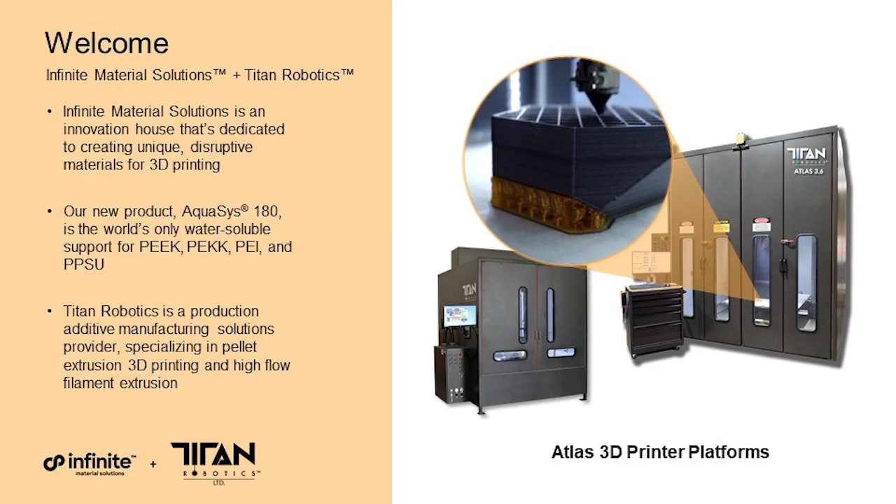Titan Robotics and Infinite Material Solutions have been longtime partners, and we're excited to share how Infinite's disruptive water-soluble materials and Titan's industrial production additive manufacturing solutions are the ideal fit and work together. We're also talking about a brand new product from Infinite today, AquaSys 180. We'll start off with an overview of today's agenda for the webinar.

Rahul Kasat, Titan's CEO, will give us a high-level overview of pellet extrusion versus filament extrusion and how those two technologies differ and how they can be used together on Titan's production additive manufacturing systems. Next, we'll talk about how Titan Systems and Infinite Material Solutions' unique water-soluble materials are a perfect fit and work so well together, and some of those applications and examples of real-life prints that are being used in production applications today.

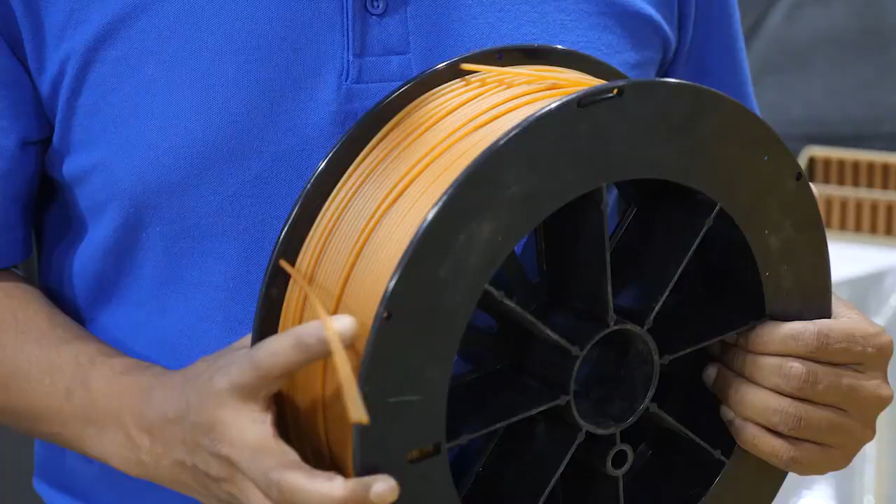We'll start off with a high-level overview of two types of material extrusion techniques that we're going to focus on today: filament extrusion and pellet extrusion. This is probably familiar ground to many of you, but to make sure, here is a quick overview. Filament extrusion, also called fused filament fabrication or FFF, is the process of extruding a thin strand of thermoplastic material or plastic filament and then depositing the molten material layer by layer.

Pellet extrusion, on the other hand, is a similar process, but instead of using filament, it uses injection molding pellets like this. As a pioneer in large format pellet extrusion 3D printing, we want to highlight several key advantages of direct pellet 3D printing. One of the biggest advantages is cost savings. Pellets are typically 10 times cheaper than 3D printing filaments. Commodity pellet materials like ABS or PLA can cost as little as $2 to $3 per pound.

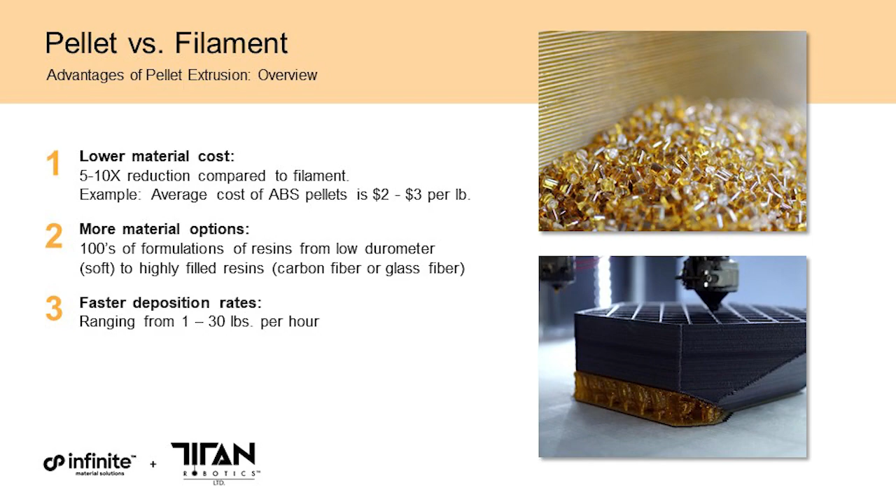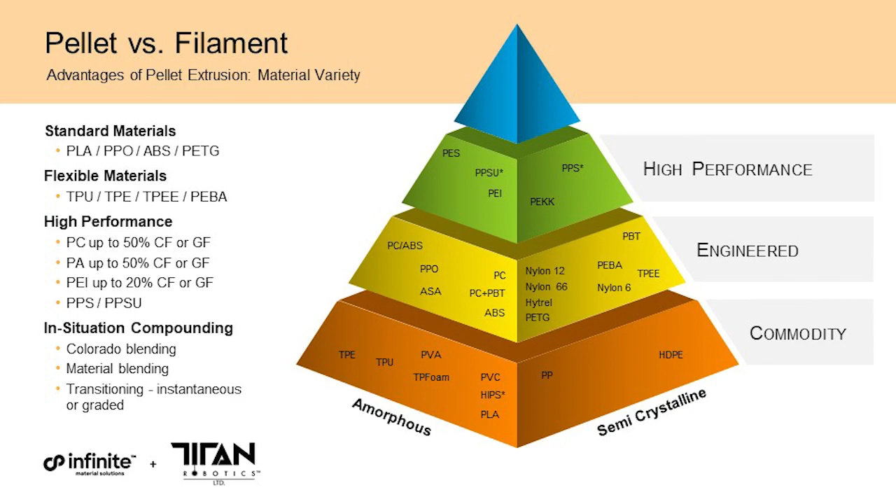Another benefit to printing with pellets is the wide range of materials that can be printed. Because the material does not need to be filamentized onto a spool, you can use highly filled materials with high carbon fiber or glass fiber content. From the high performance to the highly flexible materials, we have successfully printed hundreds of grades of pellet materials. This means you're not limited to just a handful of materials that are available on the market.

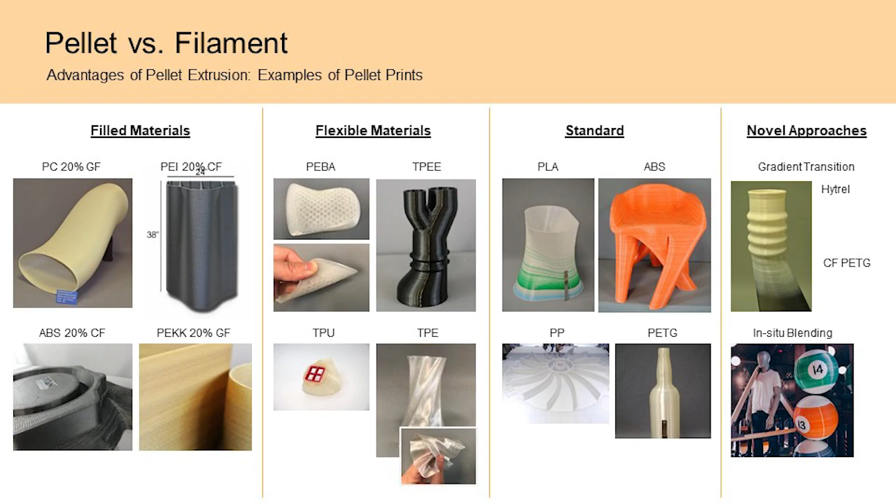You can choose the right material for your application, or work with a material supplier like IMS to create custom compounds. Here you can see a small sample of some of the materials and the parts we have printed out of a variety of pellet materials. Pellet extrusion can achieve high resolution by printing with smaller nozzles, such as 0.6 millimeter, or even in some cases 0.4 millimeter nozzle diameters on Titan's Atlas platform. The nozzle size, especially on the smallest end, is highly dependent on the material and part geometry.

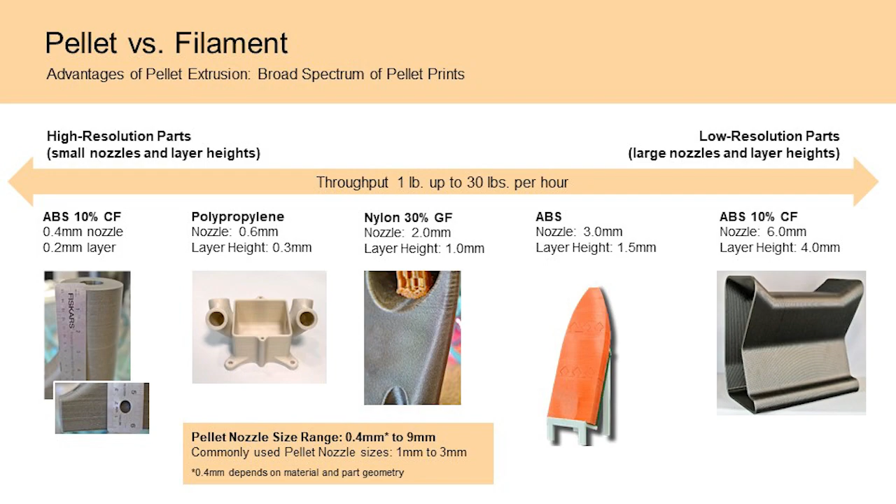The throughput you can achieve with pellet extrusion 3D printing is also higher compared to filament extrusion. With a larger nozzle and more liquefied material, flow rates can range from a few pounds an hour to up to 30 pounds an hour, depending on your nozzle size, material choice, and part geometry.

I'm going to show you two examples of parts printed using Titan's pellet extrusion technology. These are very unique materials. One is a highly flexible material, TPE, which you cannot print with filament extrusion technology because you can't even make filaments of this. You can see the flexibility of this material. The part came out of the Atlas 3D printer.

The second part is a highly stiff material, made out of 30% glass fiber PEKK. Again, you can't even make a filament out of this. So this is a unique part that you can 3D print using Titan's pellet extrusion technology.

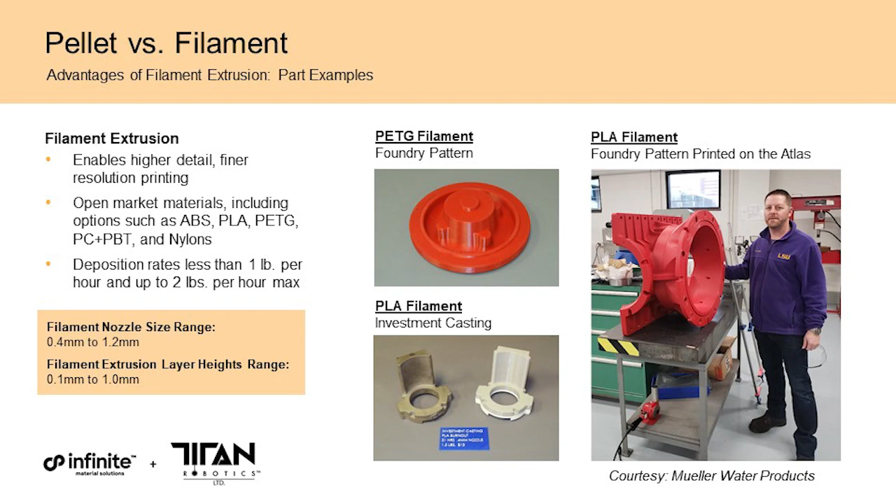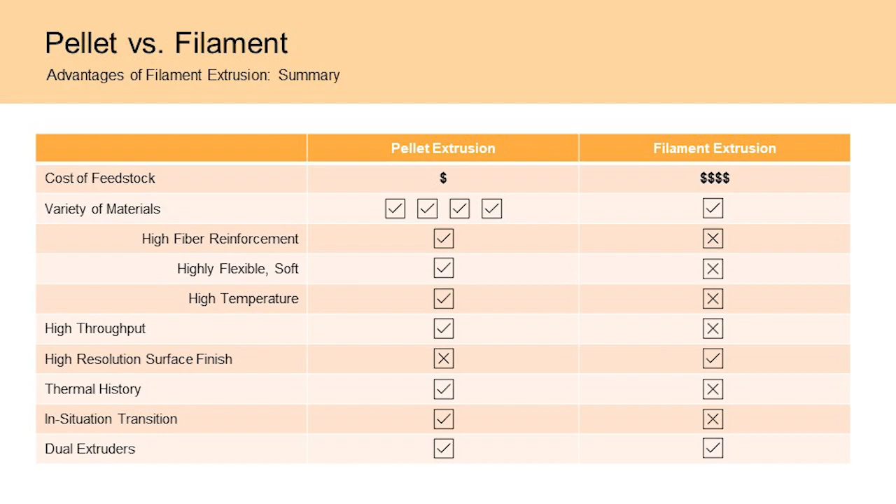To summarize, printing directly with thermoplastic pellets is up to 10 times cheaper than filament extrusion, up to 10 times faster than filament extrusion, and opens the door to hundreds of materials that can be 3D printed. When it comes to surface resolution, filament extrusion will have the advantage. But filament extrusion tends to be a slower process with much longer print times compared to printing directly with pellets.

Here you can see the incredible speed at which a pellet extrusion part is being 3D printed, reducing print times from days to just hours.

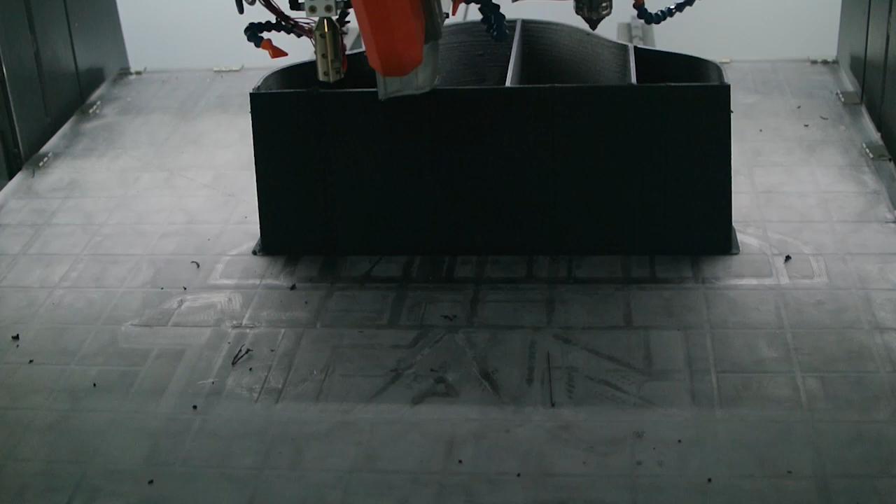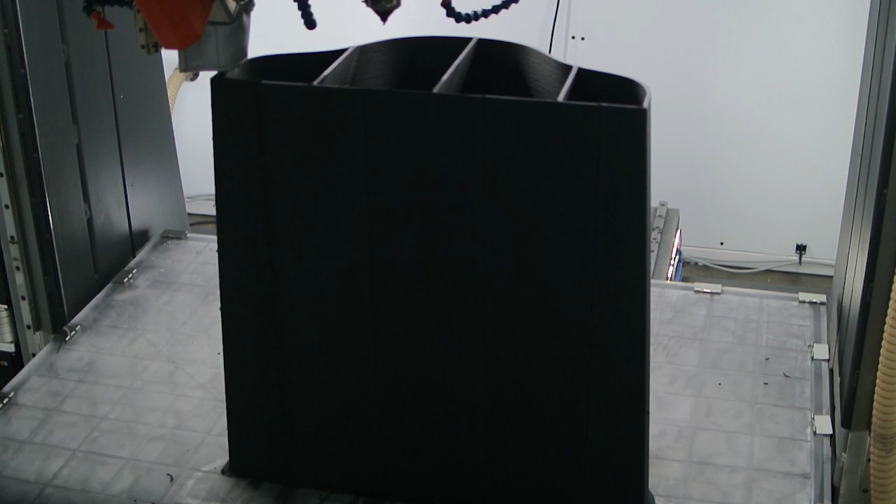When you compare the two technologies, this 40-inch layup tool only took 12 hours to print and cost less than $500 in material for carbon-filled High-Temp with pellet extrusion technology. If you had to print the same part in filament extrusion, it would have taken 120 hours to print and would cost almost $2,500 in raw materials.

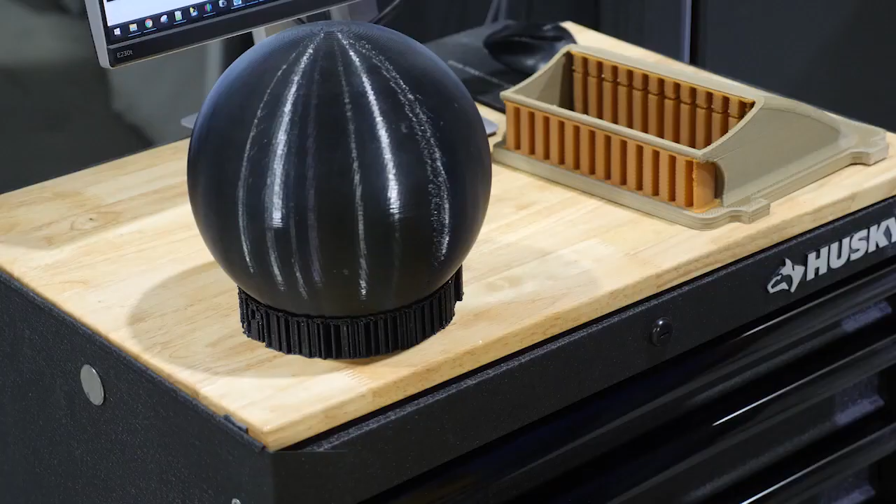Let's talk about why we need support material. No matter what type of extrusion process you're using for 3D printing, overhangs and support structures are always a consideration, especially when you're trying to make complex geometries. Because you can't extrude molten plastic into mid-air, any part that has an overhang over 45 degrees will require support structures to hold up the plastic.

Support structures can be printed out of the same material as the model, as seen here. We use ABS plastic to print the top section and also the same plastic to print the bottom section. But removing this support can be difficult and leave behind artifacts where the supports were manually removed.

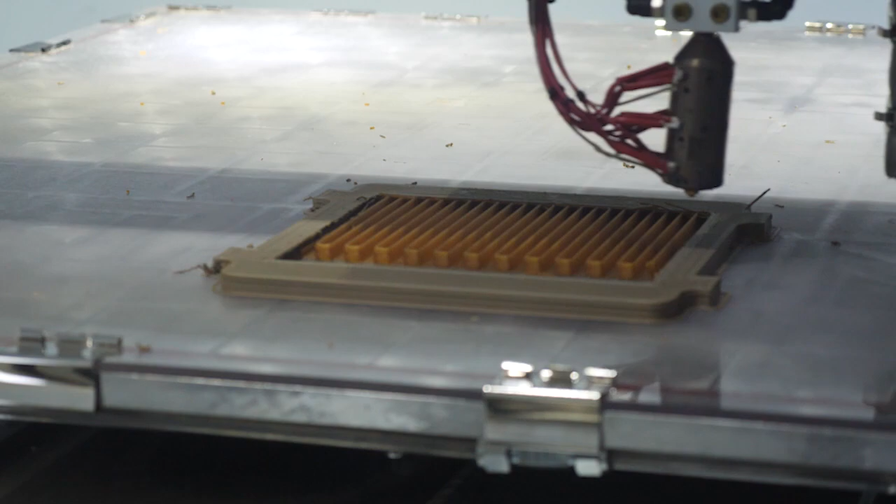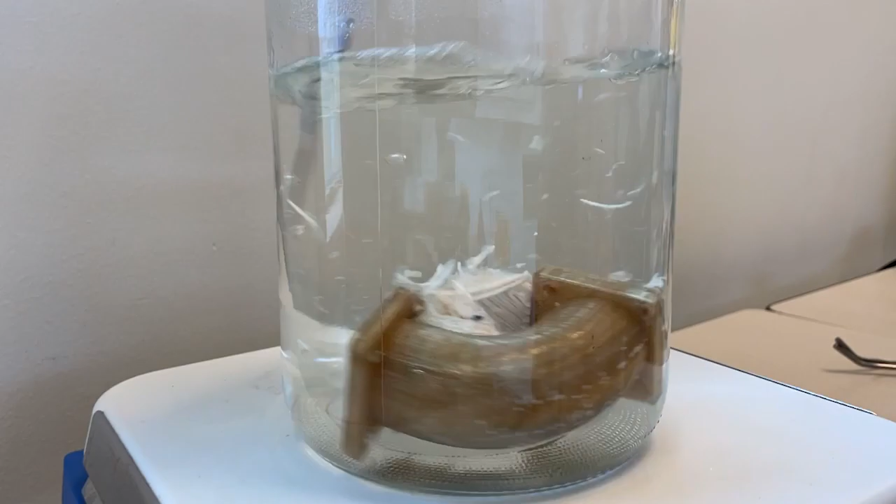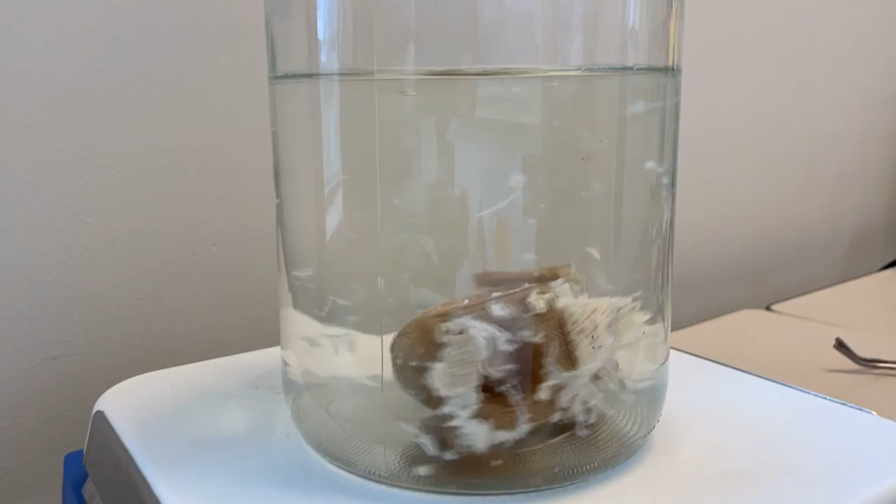With a dual extruder configuration, such as the hybrid pellet plus filament extrusion system seen here on the Atlas, support structures can be printed out of a water-soluble support material such as Aquasys 180. That material can easily be dissolved away using warm water. This method leaves behind a better surface finish when the supports are removed, and is not as labor-intensive as manually removing supports and sanding the part to get an excellent surface finish.

As an industrial additive manufacturing solutions provider, Titan's production-ready systems and technology are an ideal fit with Infinite Material Solutions' innovative and disruptive materials. Titan's mission is to enable the adoption of additive manufacturing into industrial production, and innovative materials like AquaSys 180 make that possible.

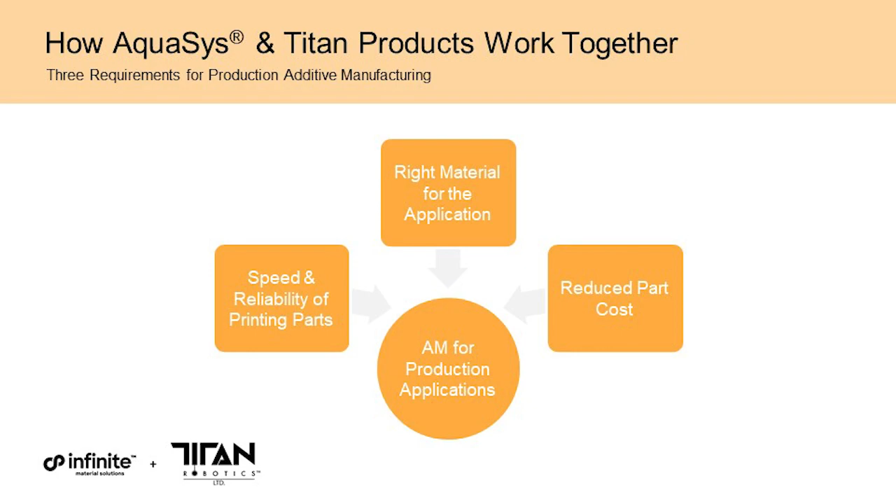In order to achieve production additive manufacturing, three elements have to come together: increasing the speed and reliability that parts can be produced, using the right material for the job, and reducing part cost. The ability to utilize high-performance, high-temperature materials with a water-soluble support material is key to produce end-use functional parts.

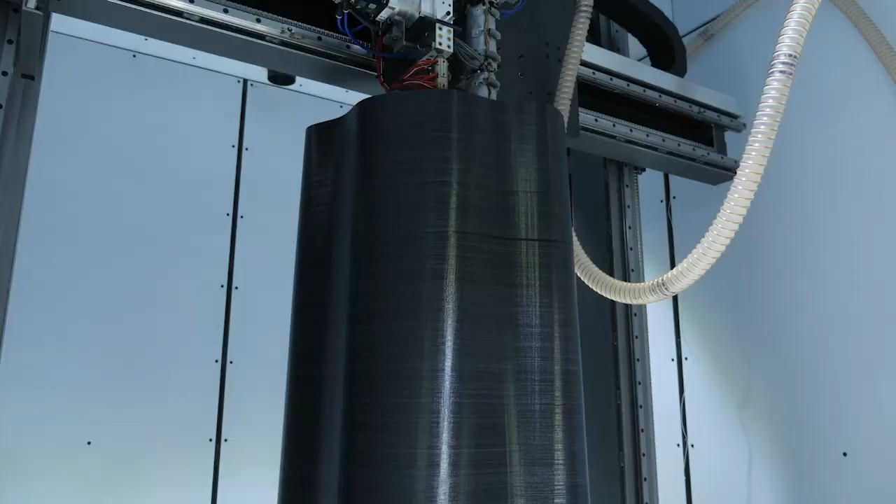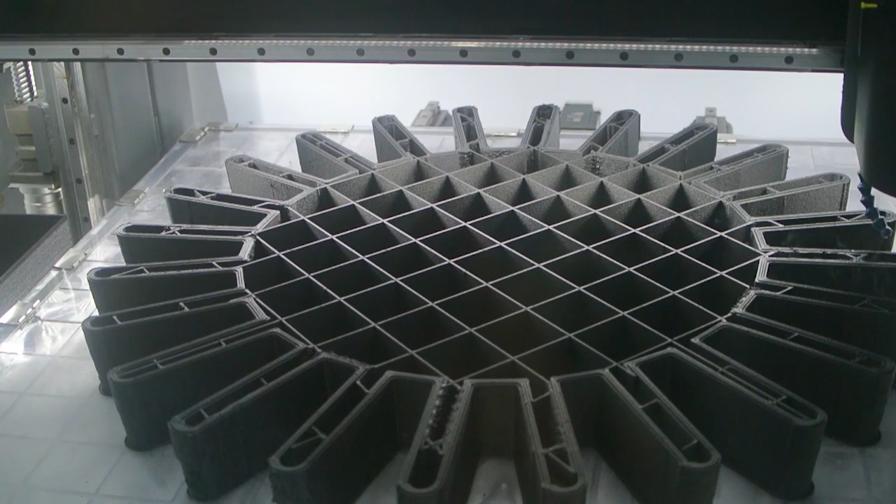We're helping to bring additive manufacturing into industrial production by increasing print speeds, bringing print times down from days or weeks to just hours. Thanks to Titan's Atlas industrial platform, a rigid welded steel frame, industrial CNC control system and servos, rapid travel speeds can top out at 1 meter per second. Print speeds will vary depending on your part geometry and material being used, as well as other print settings.

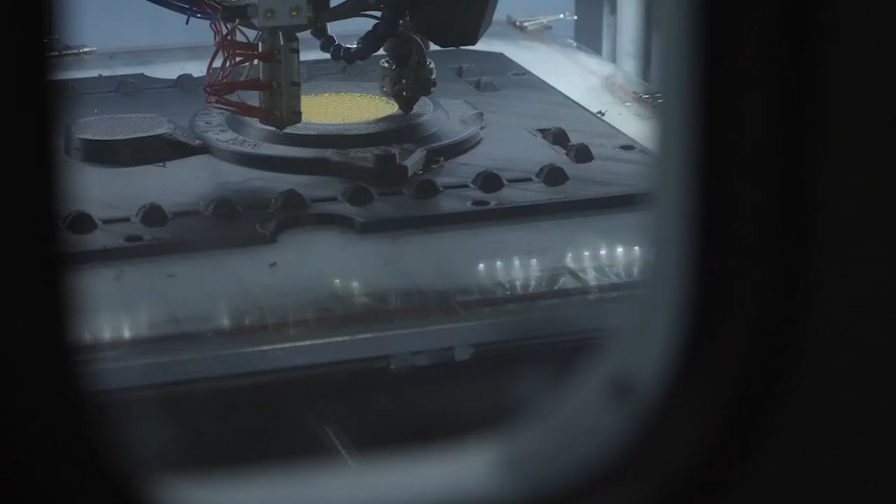But with pellet extrusion, you can reduce part production time significantly. Industries such as aerospace, automotive, and foundry are reducing their cycle times by bringing tooling manufacturing in-house using pellet extrusion 3D printing. Instead of spending weeks creating a large tool, they spend days and can quickly get the tool on the production line for use in composite layup molds, green sand casting, and more.

The 3D printed tools are also tough enough to withstand hundreds and in some cases thousands of cycles. Having the option to choose the right material for the job is also crucial to creating production parts.

Printing large industrial parts out of high temperature material requires the right temperature environment to ensure the parts do not warp, crack, or delaminate. Most polymer materials, including ABS, polycarbonate, nylons, PEI, and PEKK, require a heated chamber for successful 3D printing. This is because the consistent hotter temperature keeps the plastic stable and prevents it from prematurely cooling and pulling in on itself. This requirement becomes even more critical when you are printing larger parts.

Titan's industrial heated chambers on the Atlas ensure successful printing with these high temperature materials along with high temperature AquaSys 180 water soluble material. The Atlas enclosure reaches 80 degrees Celsius, which is 176 degrees Fahrenheit, and is actively heated, so it maintains a consistent temperature throughout the chamber and for the entire printing process, a must for printing larger parts out of high-temp materials.

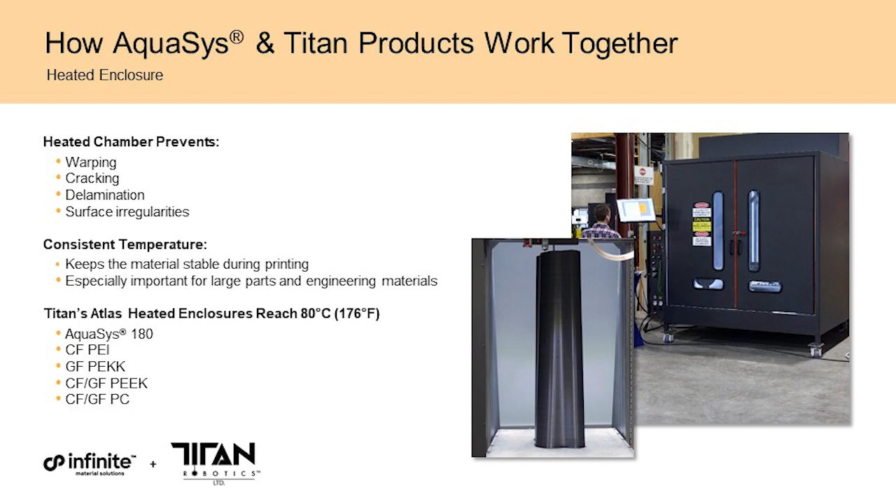Thanks to Infinite Material Solutions' new innovative AquaSys 180 formulation, this water-soluble material is stable at high temperatures, which is required for printing large parts out of PEI, PEKK, polyketones, and more. This meets two of our requirements for production additive manufacturing: using the right high-performance material for the part, and lowering part cost by using pellet feedstock for the model material.

Because as we stated earlier, pellets typically cost 10 times less than traditional filaments, Titan Robotics Atlas 3D printers offer both pellet and filament extrusion on a single gantry. We call this a hybrid system because it gives customers the ultimate flexibility and control by enabling two materials to be used, taking advantage of both extrusion technologies.

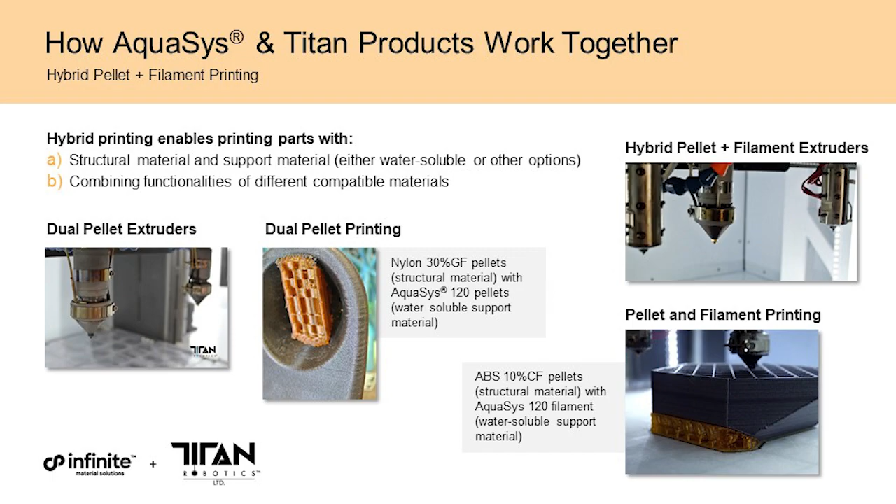With the option to use AquaSys 180 either in pellet or filament form, industrial customers can choose the right method for their parts. For example, a highly filled high-temperature pellet feedstock, such as carbon fiber reinforced PEI pellets, also commonly known as ULTEM, or glass fiber filled PEKK pellets, can be used as the model material in the pellet form, with AquaSys 180 in the filament form to create support structures.

Now that we have gone over how Titan's technology and IMS AquaSys material work together, it's time to show them in action. The versatility of this water-soluble material and Titan's industrial pellet extrusion 3D printing on the Atlas enables their use in production applications in a wide range of industries from aerospace to automotive, foundry, commercial appliances, and many more. Today we will demonstrate two of those industrial uses in applications for the automotive and aerospace industries using the AquaSys material and different extrusion technologies from Titan Robotics.

We'll talk about dual pellet extrusion, where we use two pellet extruders to print either a support and a model material, and then hybrid pellet and filament extrusion technology, where we use the pellet material for the structural part and filament material for the water-soluble part.

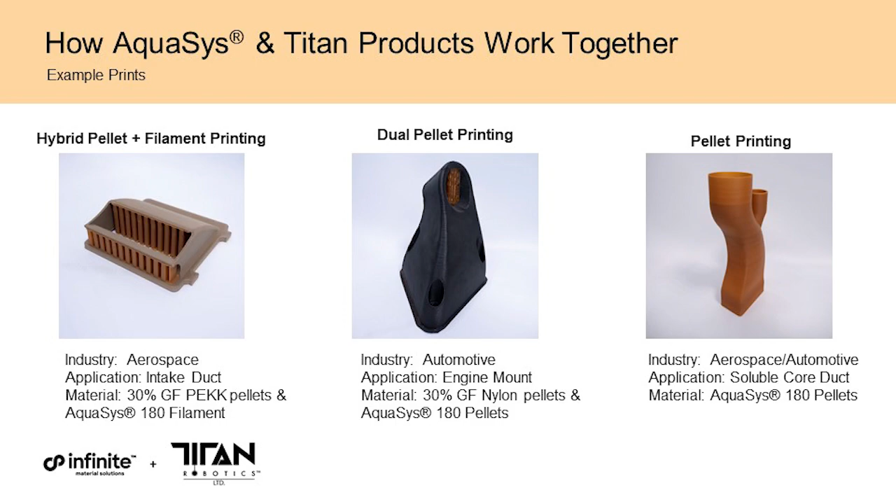We're also going to talk about a new application that you have never seen before: 3D printing a soluble core using Titan's pellet extrusion technology. The first application we're going to talk about is the aerospace duct intake that's been printed with Titan's hybrid pellet and filament extruder technology.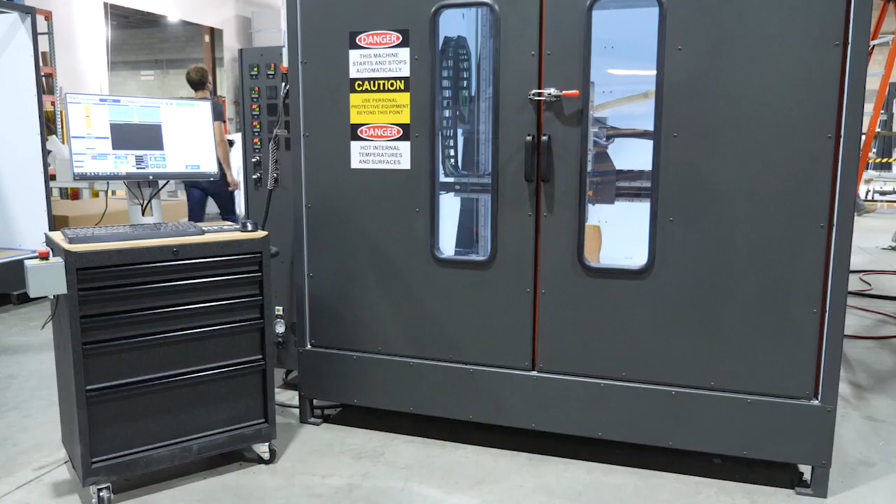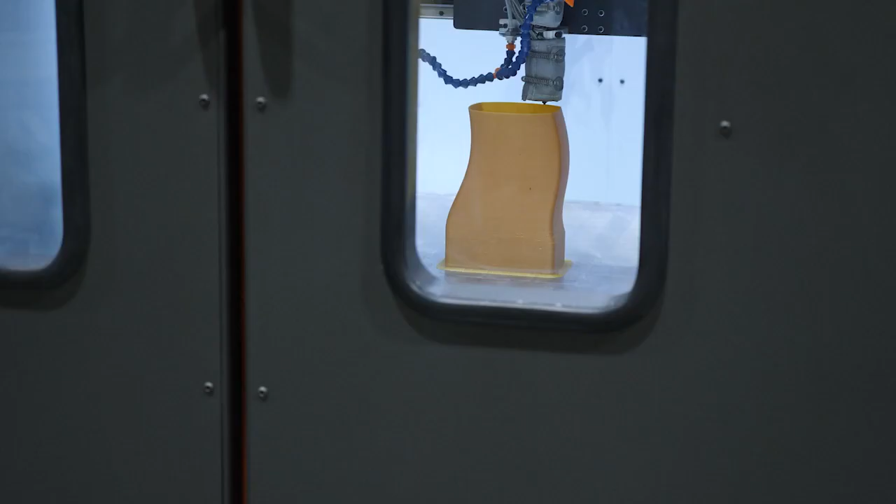Composite parts are manufactured by a variety of different traditional methods, for example, clamshell tools or patterns. Producing hollow composite parts can be a huge challenge. Cost of raw materials and labor could be significant, and there is a limitation on how complex of a part one can produce. In recent times, industry has been using 3D printing, especially in filament form, to print soluble core applications. Even though that idea is interesting, the challenge is filament processes are still more expensive and slower, and there is a limitation on how big of a part you can produce.

So with Titan's pellet extrusion technology, we can now print AquaSys 180 in pellet form.

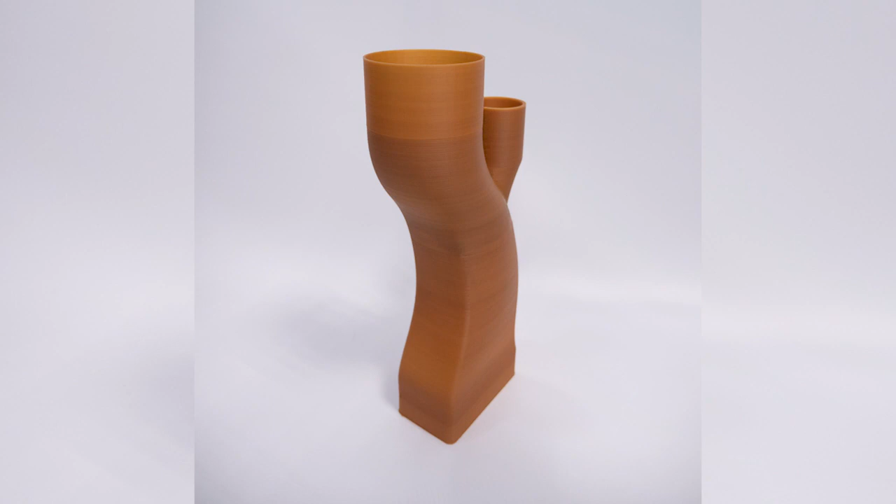We can print it at really high speed, and we can print larger parts for soluble core application, which is going to be a game-changing technology for a lot of different industries.

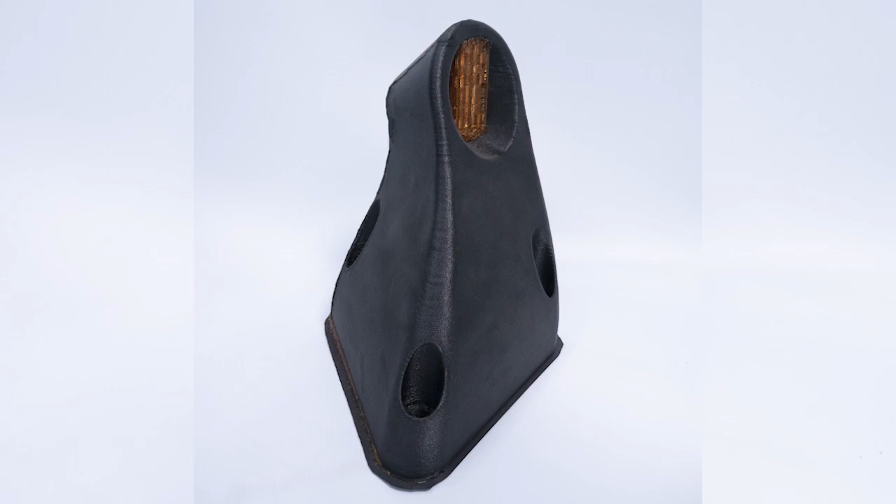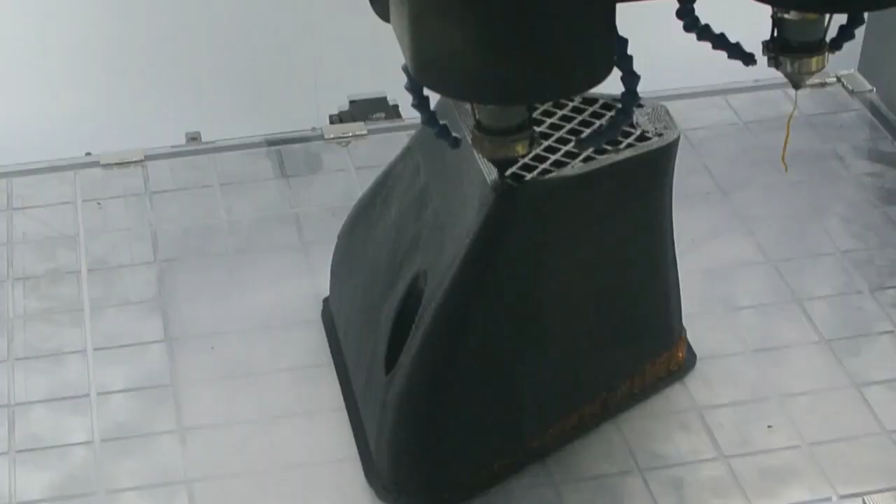Finally, we're going to talk about another automotive application. This is an engine mount, actually printed with Titan's dual pellet extrusion technology. In this case, both the structural material and soluble material have been printed in pellet form. We're introducing another great product from IMS here, AquaSys 120, their general purpose grade for water-soluble support material. We used glass-filled nylon, about 30% glass fiber, as the structural material, and AquaSys 120 as the support material.

As you can see, this part was printed in about 8 hours, and once printing is completed, you can dissolve AquaSys 120 using warm water and get a clean, functional part.

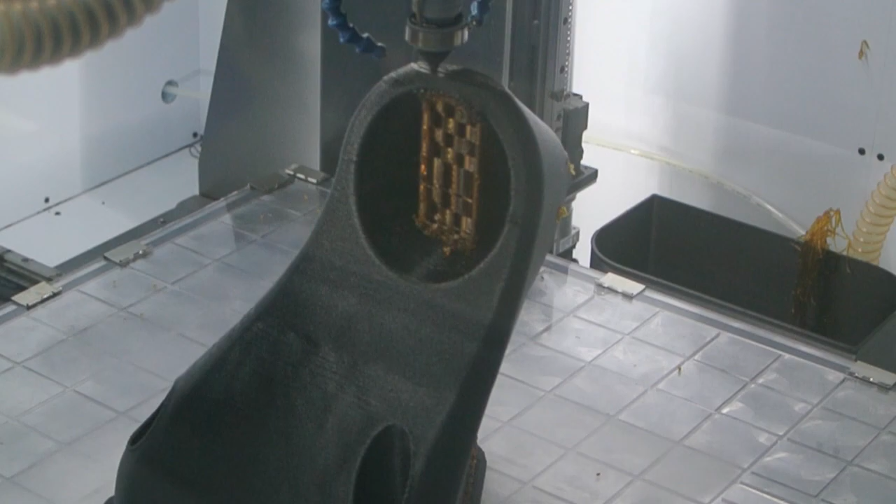Hi again. As I mentioned in the agenda, I'm going to introduce you all to some of Infinite Material Solutions' exciting new products, including our AquaSys 180 product. But prior to doing that, I thought I'd share with you our perspective on how we innovate at Infinite and the types of products we strive to create.

At Infinite, we strive to create products that offer our customers the only solution to their problem. By doing so, we believe that creates exceptional customer value and intimacy. So the only statement is kind of an abstract thought.

So let me give you a specific example of AquaSys 180 and what we believe is the only statement it fits. We believe that AquaSys 180 is the only tap water soluble support material that functions with high temperature engineering thermoplastics, for example PEEK, PEI, PPSU, and PEKK. So that's a fairly compelling 'only' statement.

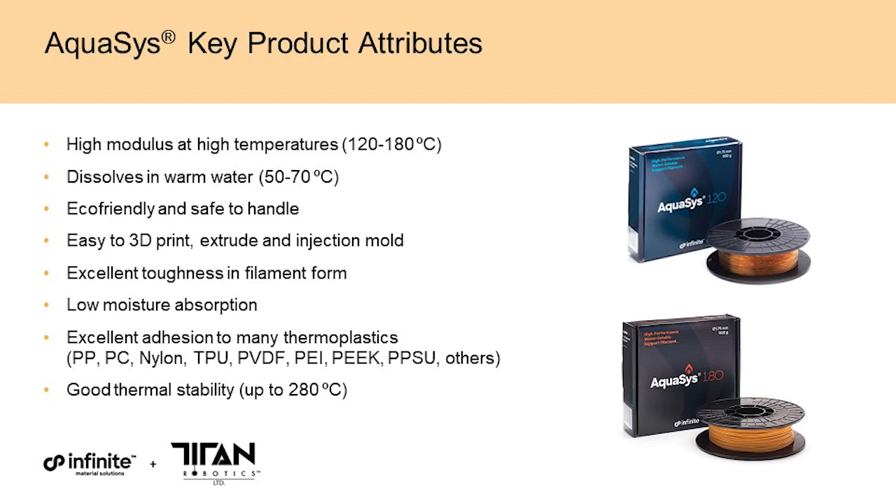So how did we do it? Now I want to tell you how AquaSys 180 works, and how it achieves these remarkable performance attributes at such high chamber temperatures. The secret is Infinite's patent-pending microfiber reinforcing technology.

Within AquaSys 180 is a water-insoluble microfiber technology, and this microfiber technology acts to reinforce our support material at elevated chamber temperatures. What you're looking at in this chart is the modulus of three different materials at different temperatures: AquaSys 180, our AquaSys 120 product, and a standard competitive polyvinyl alcohol type material, PVA.

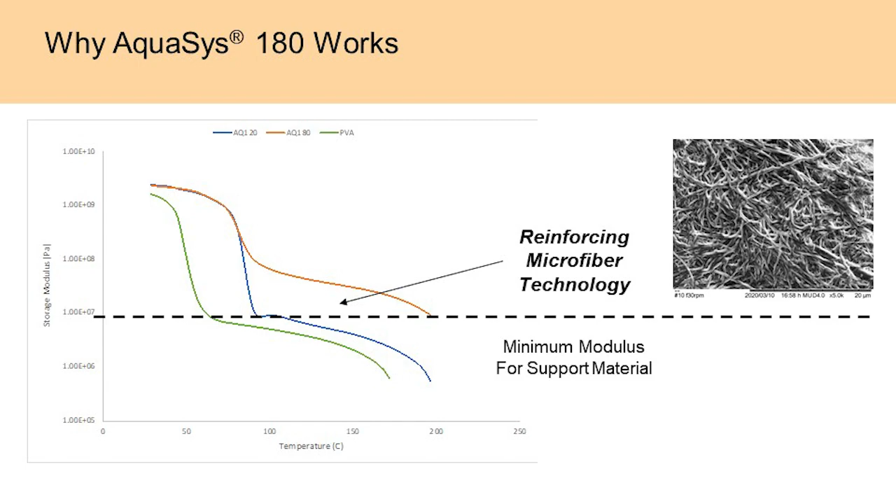Now I'd like to tell you about where we think some key product applications for Aquasys 180 are. Aquasys 180 pairs extremely well as a support material for high temperature engineering thermoplastics like PEEK, PEI, PPSU, and PEKK. That's one very key area that we believe will enable design freedom for people trying to print those materials in all kinds of different applications.

Another area we're very excited about and have had very successful beta tests in is soluble core applications. This is when you 3D print a soluble core and then wrap it with a carbon or glass fiber layup. After it's cured, you wash away the soluble core material and you're left with your structural element of the continuous fiber reinforced thermoset.

As I mentioned, this is a very demanding application. Oftentimes these particular parts have to be autoclaved at temperatures as high as 170 degrees C and pressures as high as 10 bar. We've had extremely positive results with Aquasys 180 so far. So if you have a soluble core application you'd like to talk to us about, please contact us and we'll get you some material for trials.

We also think it's going to enable a variety of end-use thermoplastic parts out of these high-temperature engineering materials in markets like aviation, automotive, transportation, and medical markets. Finally, we've had some early success in investment casting applications. Again, almost analogous to soluble core, but in this instance a part is printed and then utilized to make an investment casting for final metal type parts or ceramic type parts. So those are some of the areas where we think Aquasys 180 is going to make a real difference.

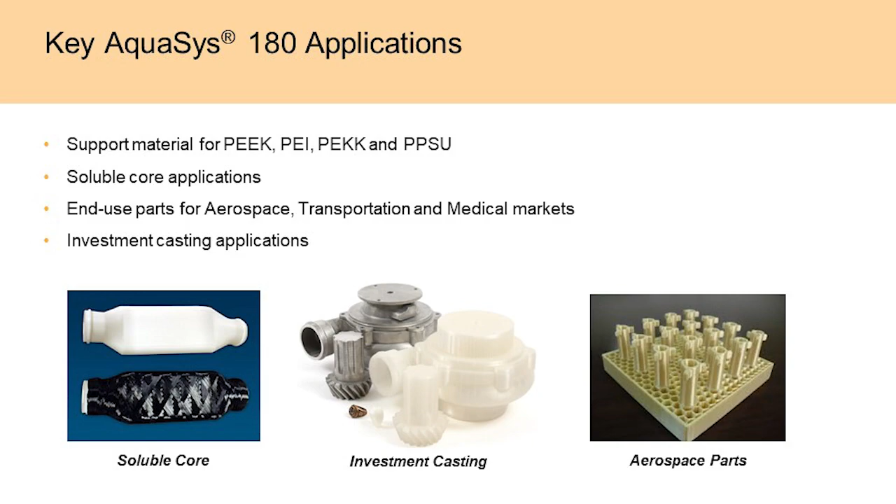Prior to ending my session in this webinar today, I'd like to introduce you to an exciting new product under development that we're preparing to launch, our Caverna product. What is Caverna? It's a combination of a water-soluble polymer or composition and a build material, a thermoplastic material. By carefully controlling the rheology and interfacial science, we're able to create, after washing away the support material and the material inside the interstices of Caverna, a co-continuous microporous foam type structure. It's analogous to the structure of bone or coral.

What do we think are some applications for such a material? We believe that because we have the ability to control this co-continuous pore size, this is going to allow us and our customers to 3D print filters, for things like water and air filtration, also potentially for personal protective equipment. Thirdly, for applications like footwear that may require a breathable, printable footwear that will also drain moisture.

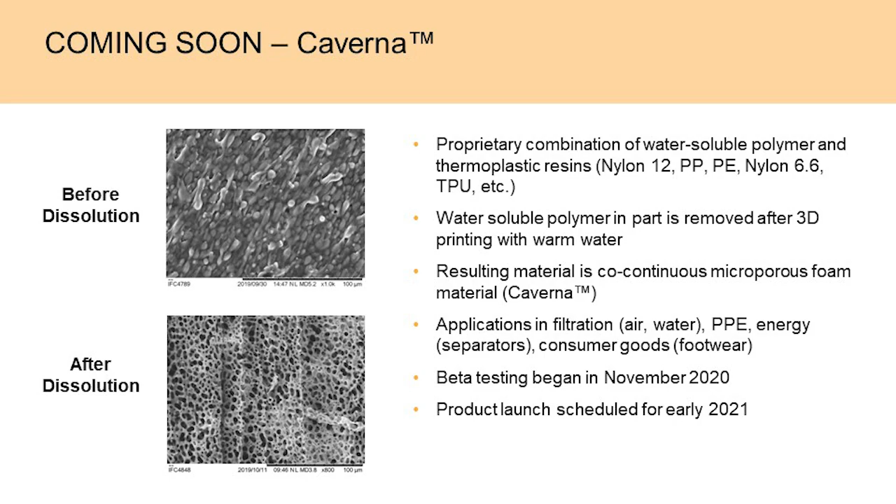We're in beta testing right now with Caverna, and we're looking to bring it to the broader market late in Q1 2021. If you have interest in Caverna, we're likely to launch it in at least 1 or 2 materials, probably a polyolefin and a nylon grade, coming up in early 2021. Please reach out to us and talk to us if you're interested in being a beta site tester.

With that, thank you so much for joining my session of the webinar. I look forward to your feedback and collaborating with you in the future.

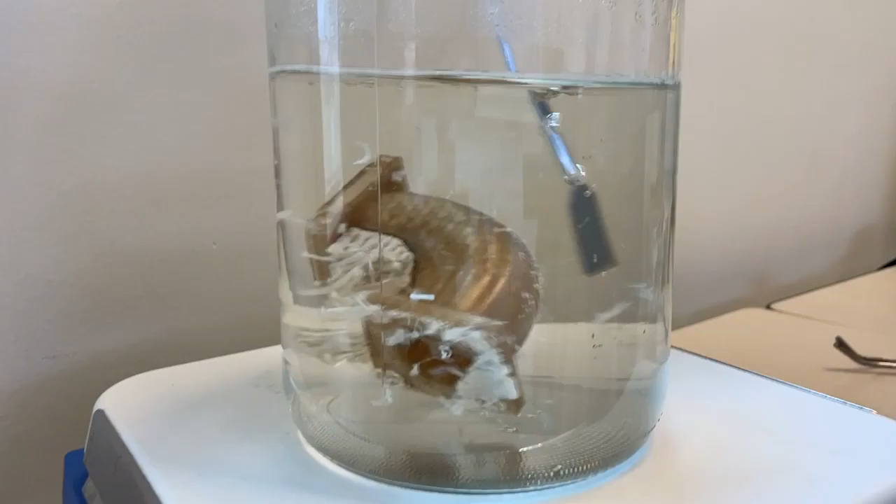First of all, AquaSys 180 is a water-soluble polymer. So how do we dissolve it? We recommend using water that's 50°C or hotter. The hotter the water, the faster it's going to dissolve. And the more agitation you can get will help the parts dissolve faster and more quickly.

Another tip for dissolving is, after starting, I really like to, after about 15 minutes or so, take any of the exterior supports that have started to soften and physically remove them the rest of the way. This really helps speed up the overall process and helps get to a cleaner part quicker. It also helps get to the most solid interface layers, which are going to take the longest to dissolve. So the quicker you can get clean water to those, the quicker your part's going to clean.

So after you get your part dissolved, you have some stuff left, right? You have a solution and you have some solid particles left in the water. What do you do with them? Any of the solid material can just go in the trash. It's not hazardous or anything. It's just the residual is going to be a solid polymer.

On a small scale, what you can do with your solution, you can either take a coffee filter or something, and try to filter out the remaining solid particulate matter, and then any of the dissolved polymer is safe to go down the drain. On a larger scale, if you've got like a big 500 liter tank that you need to dissolve, you're probably going to want to send that through a non-hazardous aqueous waste stream. It's probably going to be a lot easier than trying to deal with it yourself.

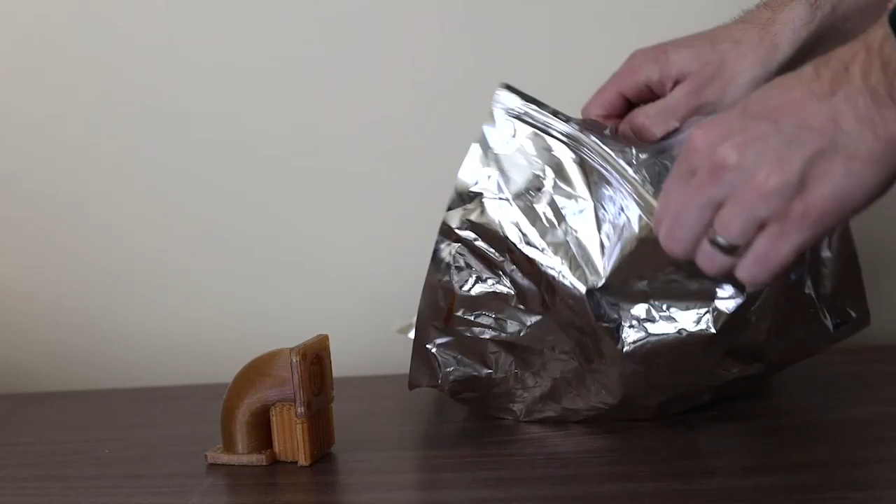The next big thing for working with AquaSys 180 is moisture management. It is a water-soluble polymer, so what you really need to do is keep it dry. In between prints, we send all of our material with a resealable foil bag. As soon as you're done, put it back in a bag or some other moisture-containing storage device. A dry box with lots of desiccant or an active drying system—any of those are going to be great for keeping your product better for longer.

If it does get wet, it can be dried at about 70 Celsius, 4 to 12 hours, depending on what you're doing. Make sure there's lots of desiccant, or use something like a vacuum oven to really drive that dew point down and get the material to dry quickly.

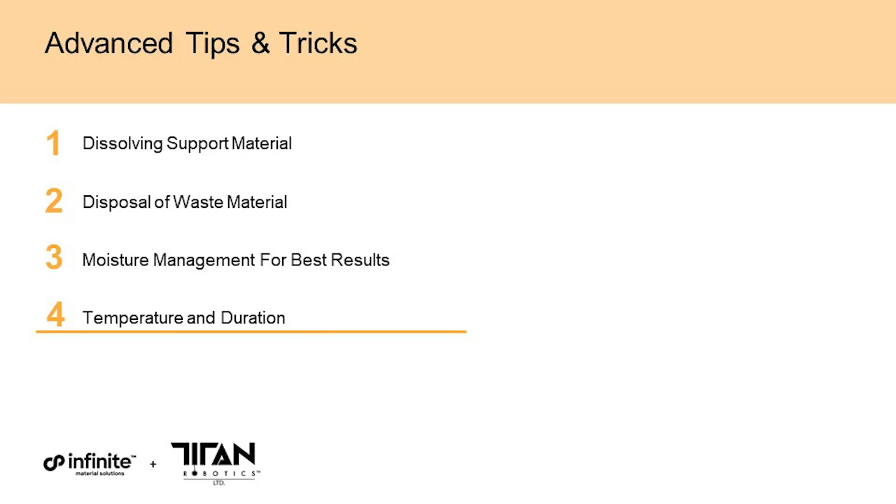So then the last tip I have for you guys is the maximum time at temperature for AquaSys 180. After a certain period of time, this material will start to lose its solubility. It'll still print and be rigid, but if you leave it at temperature for too long, it'll be much harder to dissolve. So at 160°C, it'll take over 24 hours at that temperature before you're going to start seeing a solubility loss. At 170°C, it's closer to about 6 hours before you start seeing a drop off in solubility. And at 180°C, you're really only going to get about an hour or two at that temperature before your solubility is going to be affected.

So anyway, those are the tips and tricks I have for you everybody today. Thanks for listening.